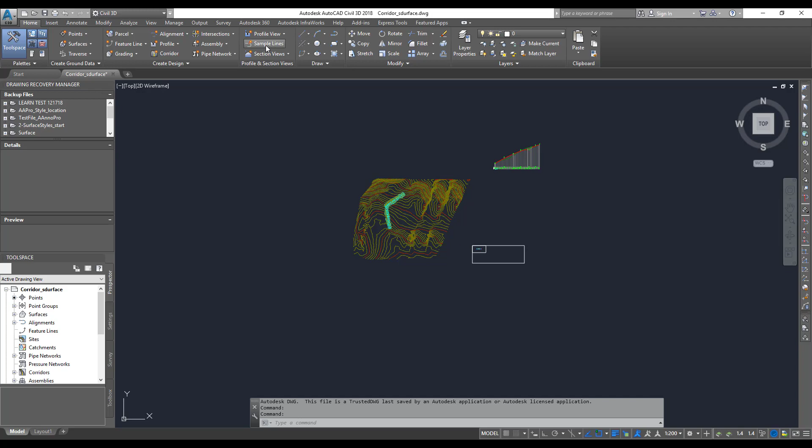So what do sample lines do? If you look under the Home tab, you can find these options right up here. Sample lines basically create a sort of section line, so if you want to get a section out of your specific objects...

...because there might be multiple objects that sit on top of each other, if you want to get a section of selected objects at a particular line, you can create a sample line at that section, as long as you want it and as deep as you want it, and then you can get a section out of it.

So sample lines are pretty useful and pretty handy tools. So let's go and create them.

First thing is, when you try to create sample lines, it's going to give you an option that says select an alignment or press enter to get the list. You can actually go and pick it from here, which is nice. And in case you're not able to find them, first check that your selection cycling is turned on.

If it is turned on, when you keep your mouse in the middle of your corridor, you should get a little marker. When you click on it, it gives a pop-up, and then you can click your alignment. So that is one option.

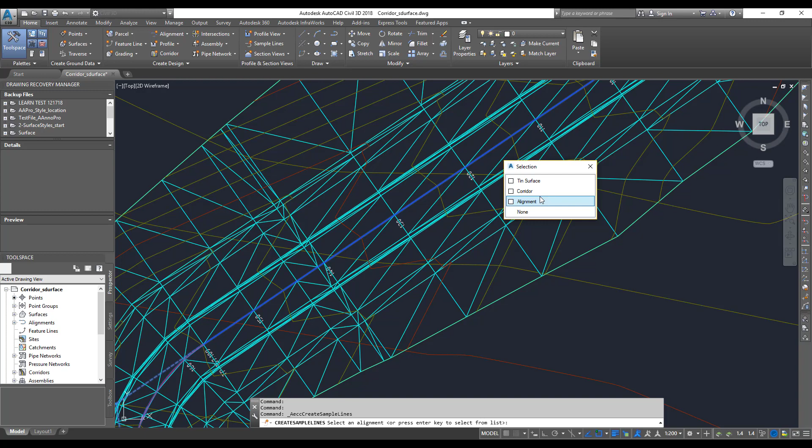Or you can press escape and then press enter. That actually brings up the list and shows all the alignments. From here you can pick the alignment you're going to use.

And remember, if you don't name your alignment with meaningful names, it's going to be pretty hard as well. So that's why I always say, guys, just put a name in there and write some description so you understand what this alignment is.

So how I use alignments generally - let's say for example, when we use it for a road project, the road project might span across, let's say, from 0 to 10 kilometers. So now we are not going to use one single alignment for this entire length - there will be multiple alignment strings being used.

So for each of those strings I will actually specify, let's say, this is M1 road project alignment, and the station range might be from 46 to 638.

And then I will also mention, let's say in the description, what kilometer range they are in, so that's much easier for me to pick up just by looking at the names.

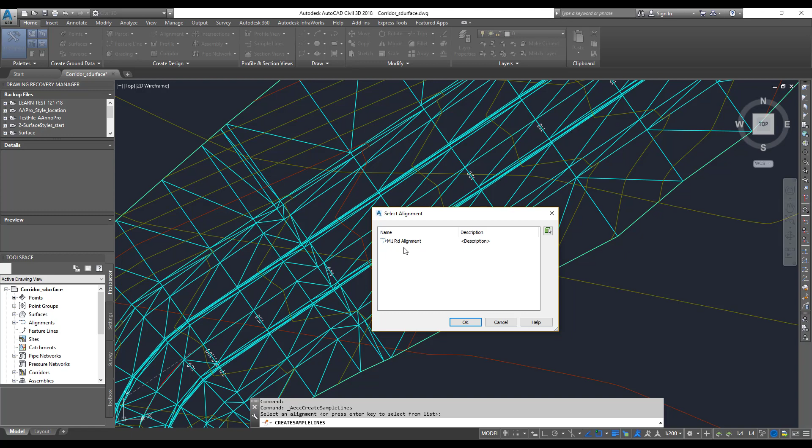So anyway, click OK - so we have picked the alignment. Now, okay, looks like it doesn't do that. Okay, so here we go.

So then we got the dialog box where you can type in a name for the sample lines, and sample lines are not the same as the profiles and alignments, which have more uses.

Sample lines are predominantly used for sections. So I'm just going to give it a name - this is going to be M1 road as well. I can say this is M1 road project.

And then the sample line style - similar to any other object within Civil 3D, you can go into the object style and change the object style as well. You can click on the dropdown here and copy the current selection.

If it's a default one, do not edit the default one; if you want to edit your style, just edit it. And in the display option, you can actually change the color for the plan view as well as the model view.

And then same with the label style - sample lines come with a certain set of labels, which you can go and change, and you can add whatever you want with that.

Another important thing, guys, is sometimes people may not want to print the sample lines when they're actually printing the plan view on an A3 sheet. In that case, what you could do is adjust both the sample line style as well as this one.

So when you're editing these styles, under the display tab, you can actually make them invisible, or you can see which layer they are using and set those layers to non-plot layers.

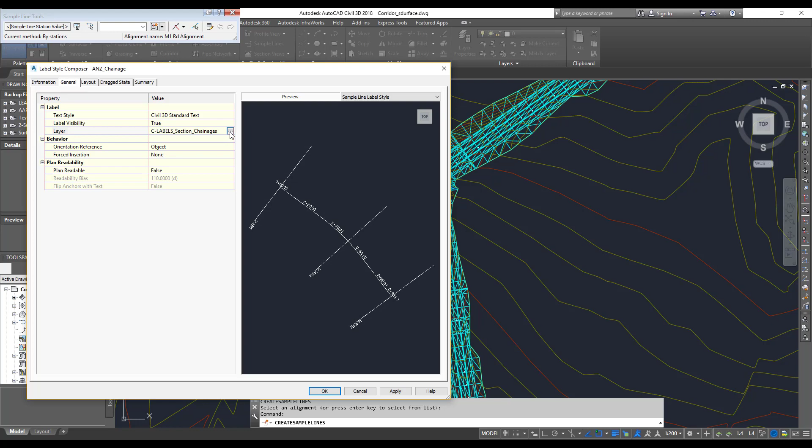So that way it's not going to get printed. The same way, when you go to your label styles for the sample lines, you can go into the general tab and see which layer we are using, and then make these layers non-plottable, so these things won't get printed on the screen. Just a little tip there.

Once we are happy with that, now we can choose what objects you're going to add to your sample line data source, and we can change it later on as well. So no rush, you can choose which one you want to have and then click OK.

Now we got a few options here. One is you can drag your mouse over and click on the screen, and it lets you create sample lines on those specific sections. It asks for a left swath width and then right swath width - this is basically from the center line, how far you want to have the sample line on the left side and right side. I'm just going to keep it 15, 15 on both sides, and you can see the sample lines here.

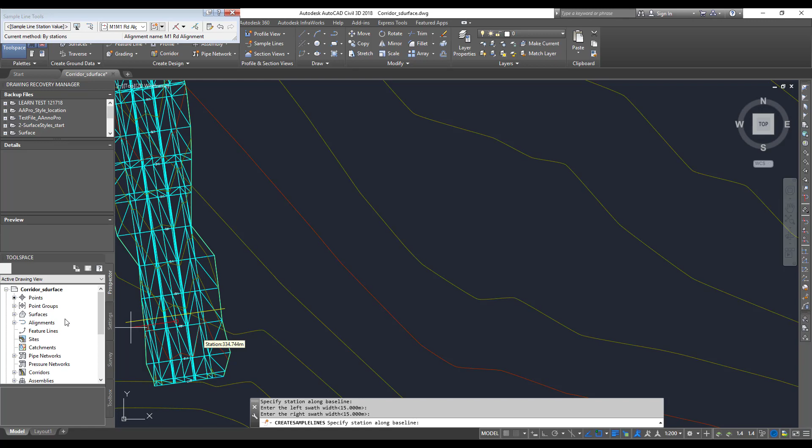Similarly, you can go and add sample lines manually wherever you want it. So it's as simple as that. Or another option which I would suggest is if you go to your sample lines flyout toolbar, and click on this drop down right up here, it gives you a few options where you can use them to create the sample lines.

One is by range of stations - that is every one of those stations that you have on your alignment, and this is based on your alignment intervals that you set for your stations. Based on that, you can create sample lines on those stations.

Another one is at station, which is the default option, where you have to click manually wherever you want the sample lines. And then from corridor stations - the corridor has got the frequencies as well, so you can use that to create the sample lines.

Pick point on the screen - you can just pick any point on the screen and it creates a sample line. And select existing polylines - if you've got a polyline, you can select it and set the interval, and it creates the sample lines along the polyline. If you have an alignment, I don't think there's a need for a polyline to use it.

Generally I would go for the option, if it's a corridor, by range of stations, which is much more logical. Click OK. So now, from the start alignment, by default it chooses the start of that alignment you've picked and the end of the alignment. If you want specific start and end values, you can choose them as well.

And left and right swath width - if you want to choose a different value for one side and a different value for another side, you're more than happy to do that. And use sampling increments, yes, we can just add a value in there.

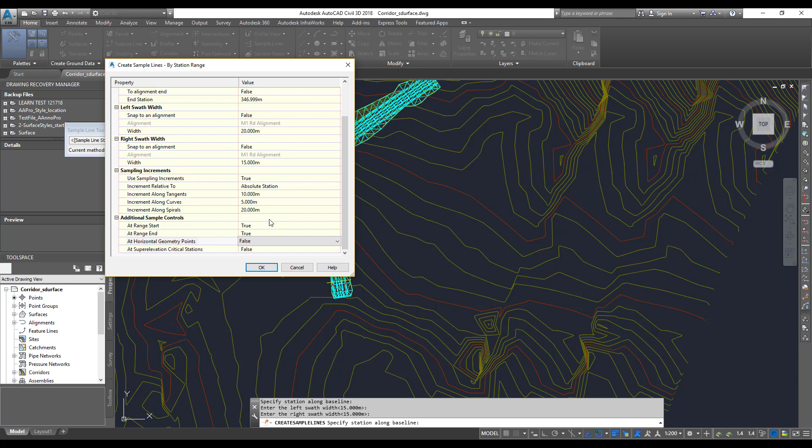And at range start, it's going to be true, and all these options are true or false. At horizontal geometry points, you can choose wherever you want your sample lines, additional sample lines. So guys, once you're happy with these settings, click OK, and then it gets you the sample lines.

Then remember, at this point you have to press enter to complete the command, because you're still in the command where it lets you create additional sample lines if you want. Now press enter and it completes the command, and then it adds a label in there as well.

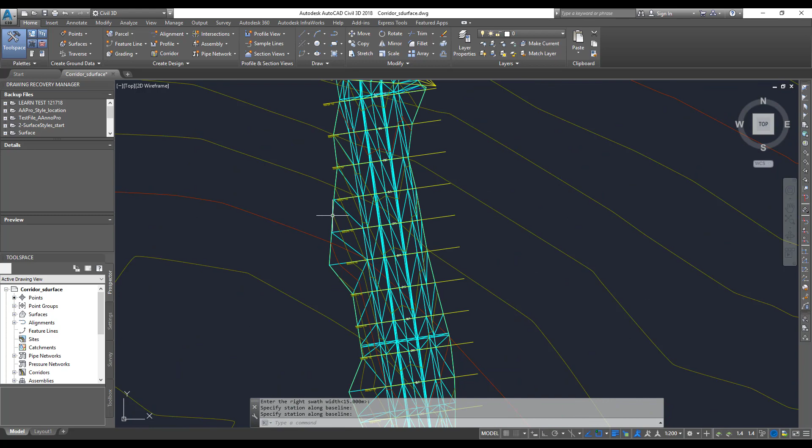So this sample line is created from the starting of the chainage of your selected alignment until the end of the chainage. Now it also puts a chainage value right up here as a label. If you want, you can hide those labels - there is a different option you can choose, sample line labels, which doesn't have this text in there.

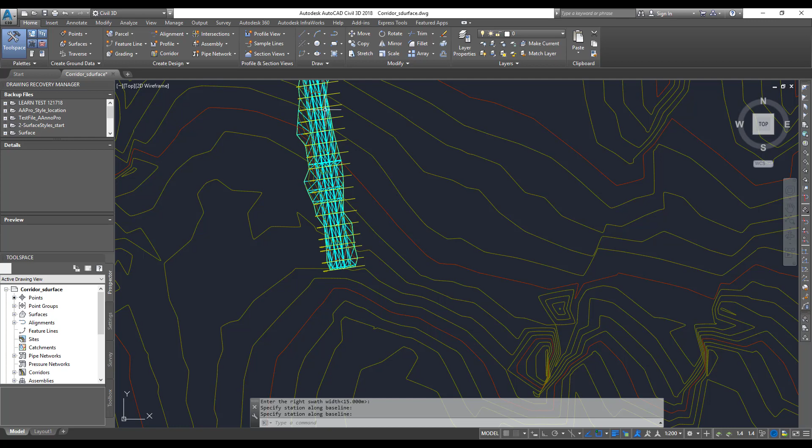Alright guys, so once you're happy with that, the next stage will be to create sections, which we will see in the next lesson.